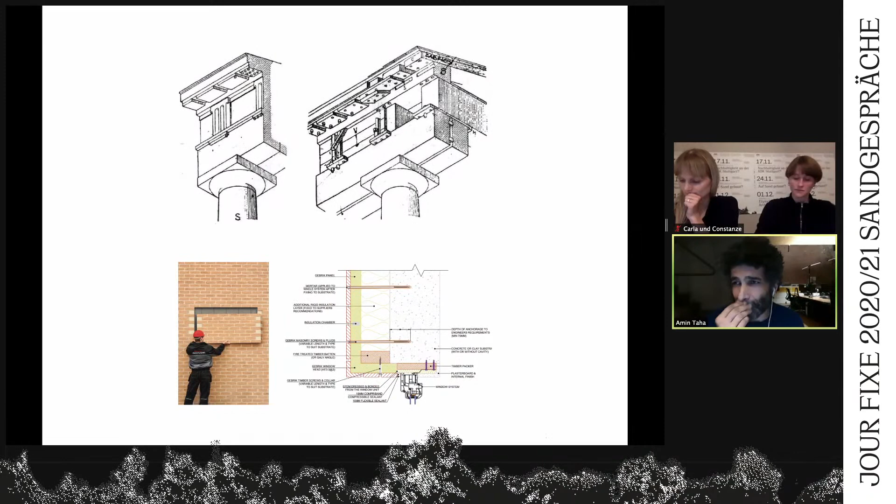why not let a contractor and a manufacturer innovate their products so you can just simply apply a brick skin, as it were, wallpaper. And the big question, which returns to your lecture series, is why not? Why not let that happen? Well, the diagram on the right tells you how typically we build today. A superstructure of concrete or steel that is thermally enclosed, waterproofed, fire rated if it's steel, and then whatever cladding, brick or stone, applied to the outside. Well, brick can hold itself up, can't it? If it's not going to hold up the building, it can certainly hold itself up as a self-supporting skin. And you can get rid of most of those other materials. So the question is more of an ethical one.

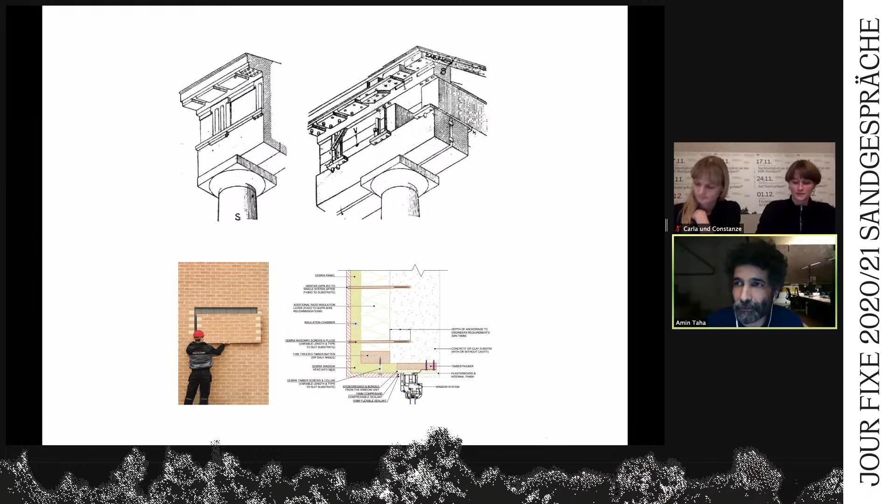So inevitably, some time after Winckelmann, people begin to question why for the last few generations as architects are we just copying, reproducing this neoclassical style? Where on earth does it come from? Why? What does it mean? And there's a number of German academics, including Semper, of course, who are asking those questions.

And then while Semper and Marx were expelled from Germany because of their sort of revolutionary ideals, they were in London, and Marx is in the British Library preparing Das Kapital, and Semper is in the British Museum looking at the new archaeological finds that have come in from Mesopotamia, what's now Iraq.

So for a throne, eventually they become ritualized in their particular knotting, and that knotting becomes abstracted in carving, perhaps into the timber instead of literal pieces of rope. And eventually that pattern becomes abstracted in terms of carving in stone or terracotta and other polychrome decoration ornamentation. But it's emblematic of a particular culture, and therefore reinforces that culture.

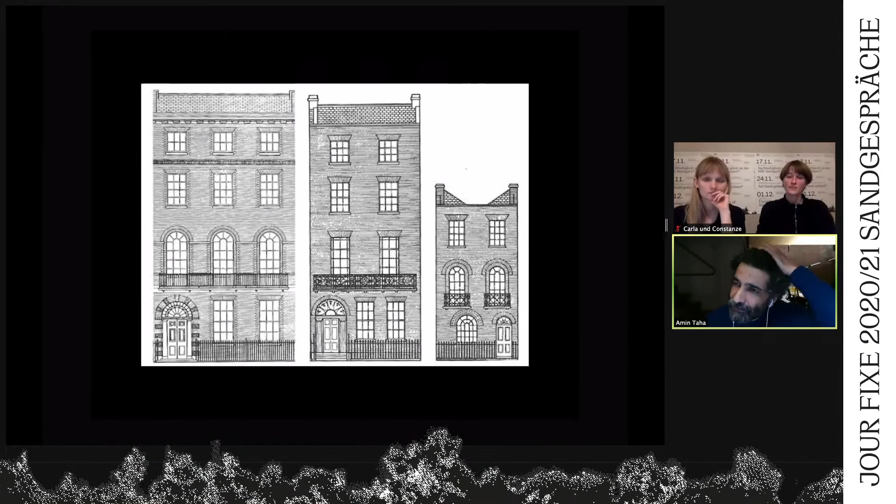So there were contractors who are also developers. They followed these pattern languages. But if you look carefully, those brick walls are actually the superstructure that holds the whole building up. They're just being composed in a way to be pleasing to the eye. So our challenge is, can we build in this inexpensive architectonic way that still has the same sort of charm, that also holds a certain sort of charm for the next few generations.

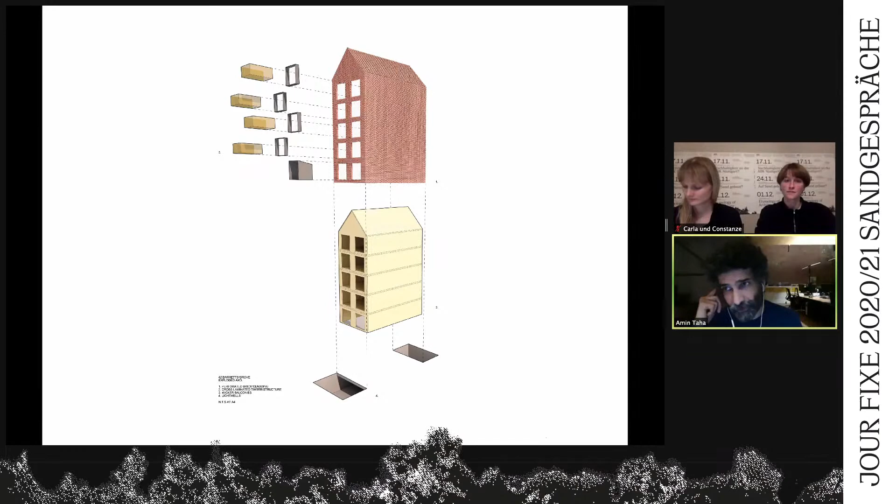Our solution is, today's requirements, thermal requirements, waterproofing requirements are obviously very different. You can't build in solid brick walls anymore for thermal and waterproofing reasons. But what you can do is the superstructure fully in cross-laminated timber and a self-supporting brick skin. So it becomes the brick that's required by our conservation area, but it's self-supporting. So the advantages of that in detail are that the cross-laminated timber is the internal finish. So there's no plasterboard, no other finishes internally.

So you've removed a great deal of material, labor, and time on site by allowing the brick to support itself, because bricks are made the same way as they have been for the last 200 years, perfectly capable of supporting themselves for 5-6 stories. All you have to do is pin them back to the superstructure to stop them wobbling and falling into the street. So you're not supporting them back to the superstructure, you're just holding them back. And the key thing about that is the superstructure does not hold the brick.

So currently, pretty much every building that's made in brick, every floor picks up the brick, which means the superstructure has to take the load and then transfer it back to the foundation. So ultimately, your superstructure is twice the size it needs to be. Completely perverse when the brick can hold itself up.

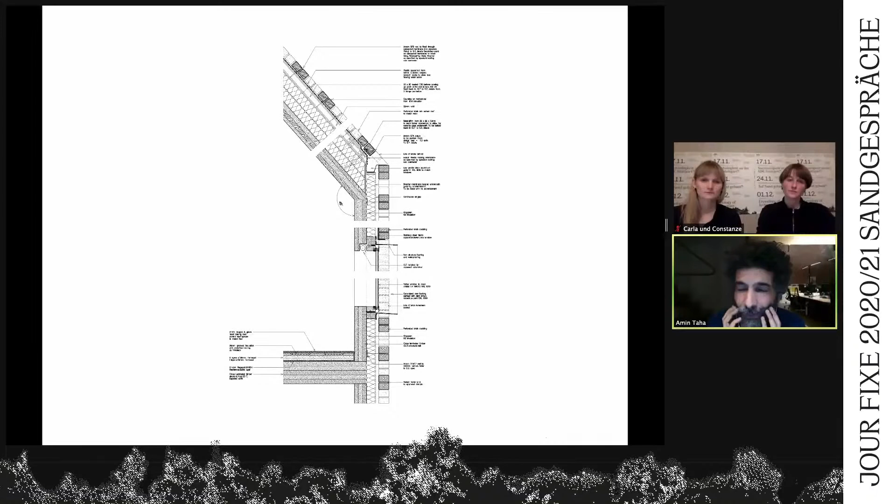So you don't do that, you lighten the superstructure, and the other advantage is the two can move separately, expand and contract separately. There's all sorts of other advantages in terms of you don't need expansion joints, you don't need weep holes, etc. It is a self-supporting skin. It does not need to be a load-bearing facade. And as a skin it's ultimately just a rain screen, a ventilated rain screen. So why bother making it absolutely solid?

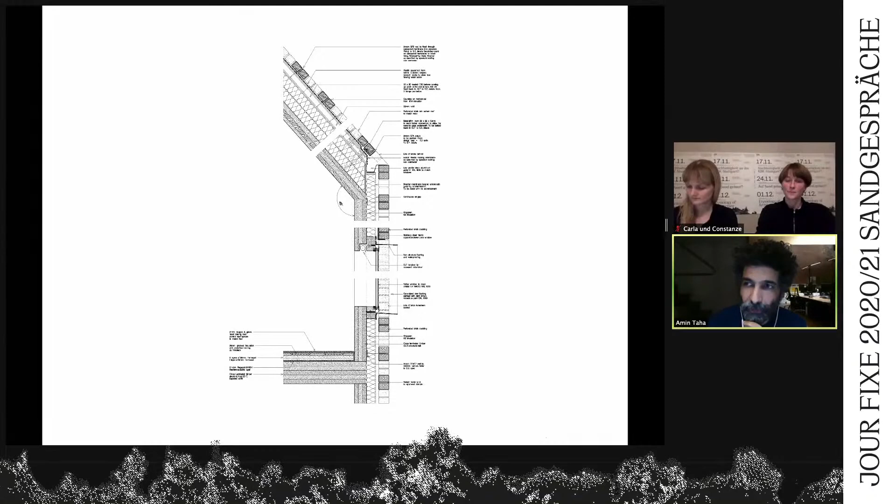You may as well just leave holes in there to ventilate. Now, this is ultimately the interior. It's all cross-laminated timber, which today you might find acceptable. But when we first proposed this in 2014 to our client, their agents said, well, no one's going to buy this stuff, but they did.

If you, as an architect, lower the construction costs, because ultimately what we did was we reduced the quantity of material on that scheme and saved the client about 25% of their construction costs. That actually meant the client ended up making 10% extra profit on their sales. Now, what that means is that really, as an architect in the private sector, all you're doing inevitably is increasing land value. You're not actually making housing cheaper because it's the private sector.

However, if it was the public sector, if you keep innovating, then obviously the borrowing by the public sector is less because you've made the building cheaper, and therefore the rents can be less. So it's highly advantageous for the public sector, no good for the private sector, apart from lowering the quantity of materials you're using, and therefore obviously being more sustainable.

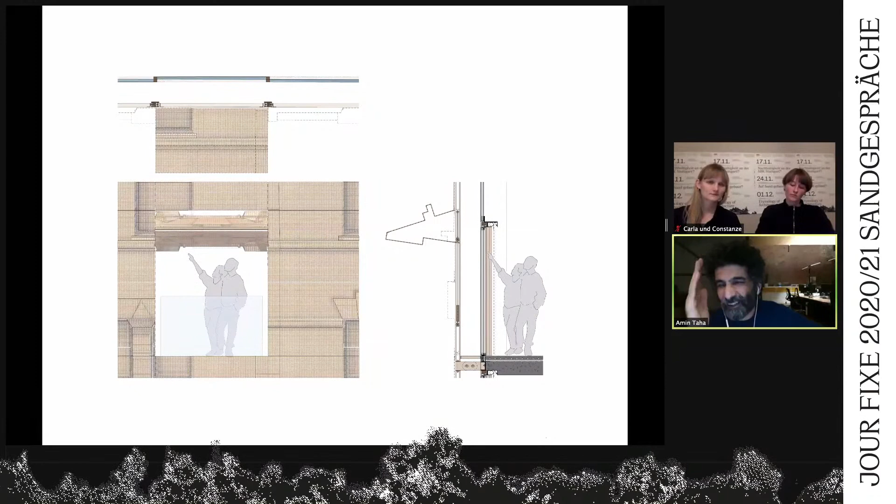And one of us, doing their thought experiment, said, well, supposing Mewès and Davis had finished the urban block, imagine if their facade was actually made out of 3 millimeters of perforated sheet that allowed us to have a very inexpensive and reduced material, real thermal facade. And then this thing in front does all the solar control where it needs to, set in front of the winter gardens, as it were, and then opens up when you want your expansive views and you've got no issues with privacy.

At the moment it's on a very busy road, with people on buses going to and from the park looking straight into your windows, and buses going past. So it had to have a number of these controls.

So the story about that last project, apart from our general background approach of how you build, what you make things out of, is leaving the decisions of those materials slightly late on in the project, because it might be, as you're doing that research, social research, historical research, that it gives you a reason to use a particular material and do away with some others.

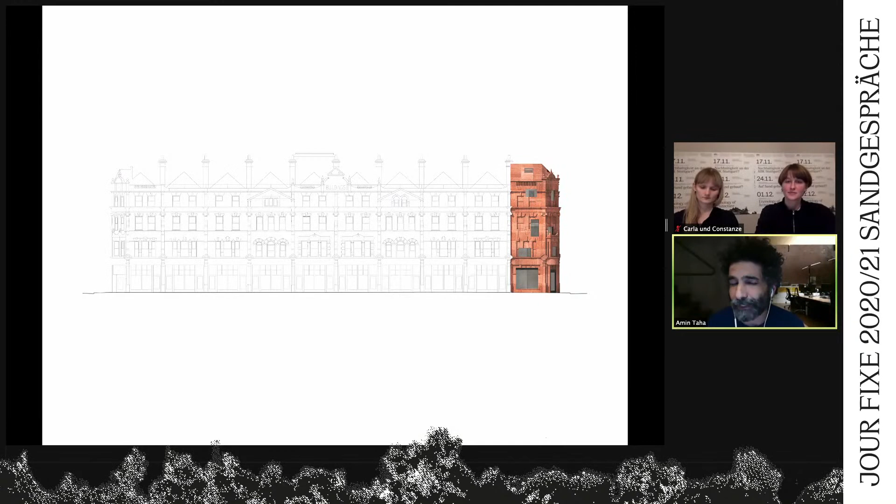And also we're directly opposite the town hall. The town hall was very keen on literally rebuilding what was there on the site, but nobody's going to do that for all sorts of reasons. And some of those I've already mentioned. You can't build in solid brick anymore. If you want to build exactly the same, the quantity of space is reduced. It's not a large site, so suddenly you end up with a compromised program internally.

And we said, well, look, we've just challenged the idea of building on the previous Bayswater site with a fake memory, an imagined memory, an imagined past. Here there was a past, and in the same way that on the previous site, when we went out to consultation and talked to councillors, they were very enthusiastic about seeing something that looked, in their opinion, old architecture. Exactly the same on this site, and no doubt we all come across this question.

And for us, the question was, why really do we like that? Why do we feel comfortable as a social group? Why do we feel comfortable with the past? Well, for all sorts of reasons, we've got used to it. But more often than not, we imagine that the past is better. It's less challenging. It's got clearer ideals, if you like, and stripped of the uncomfortable realities.

And interestingly, I think in German, the word for monument is Denkmal, isn't it? But here it's just simply monument or statue or sculpture. While Denkmal is a bit more direct, isn't it? So here we forget that monuments are really there as emblematic of an ideal, and we're all aware, especially today, that those ideals are often very flawed right from the outset. So the idea of this project was, let's choose a material which speaks of flawed ideals. Yeah, it's a monument. We're recreating the past, but clearly the whole concept of recreating the past is flawed. So let's choose a material that does that.

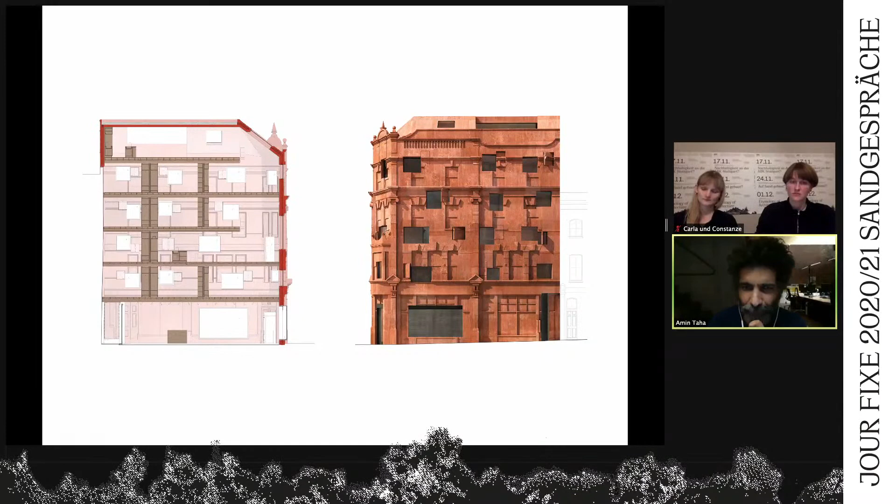So this is a terracotta mix that was in situ. And if you can see in that section, essentially it's a hollow cast. So just like casting a bronze monument, it's hollow. And then the new inhabitation in there is entirely timber. It's all CLT. So on balance, it ended up being neutral because we're spending carbon and money on the skin, but internally it's all negative, because it's all timber, apart from the fireplaces. I had to test this beforehand because no one had exactly done it like this before.

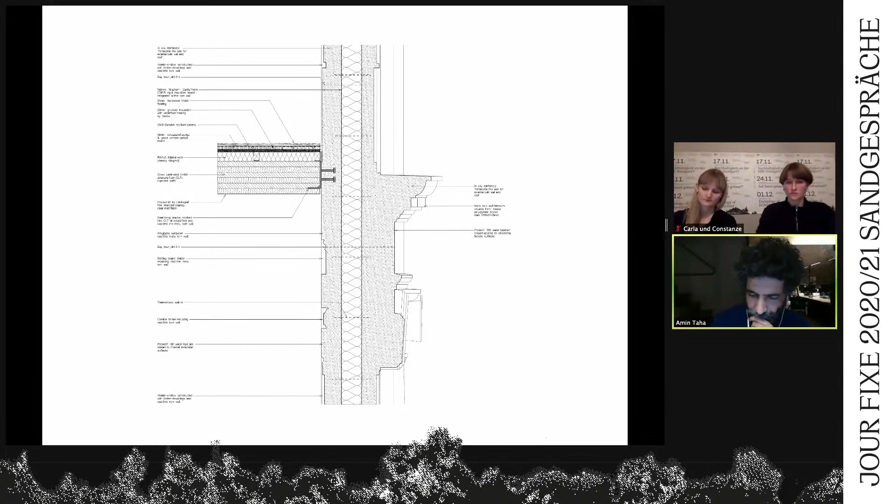So it's all in situ. It's not precast panels that are stuck on. The purpose of it being in situ is that the facade is actually holding up the building. So in that detail, you can see there, it's a twin facade with insulation in between. The two are tied together, and the CLT then is slotted into those brackets that are cast into the inside face. That's it, finished.

What we actually did was we surveyed the building at the other end of the terrace. We took that survey, flipped it, mirrored it by 180 degrees, as it were, and then translated that as a three-dimensional model to the company that did the routing out of the formwork. And we said, look, first of all, the material itself has flaws, but the process of us taking that model and sending it to the routing company inevitably will have flaws. We don't want them to correct it. And similarly with the contractor, we didn't want him to correct any flaws in the grout loss, because this sort of material doesn't want to be perfect.

And then internally, similarly, we actually put wallpaper with a release agent on it, so you get the print of the wallpaper. And as you can see there, everything else is just timber, apart from the fireplaces.

We were asked to do another competition we won, but in Sofia, in Bulgaria, which is linking a green park, landscaping, transport interchange. We all know the common languages of infrastructure, especially tube stations, metro stations, airports, and railway stations. They come with an automatic language.

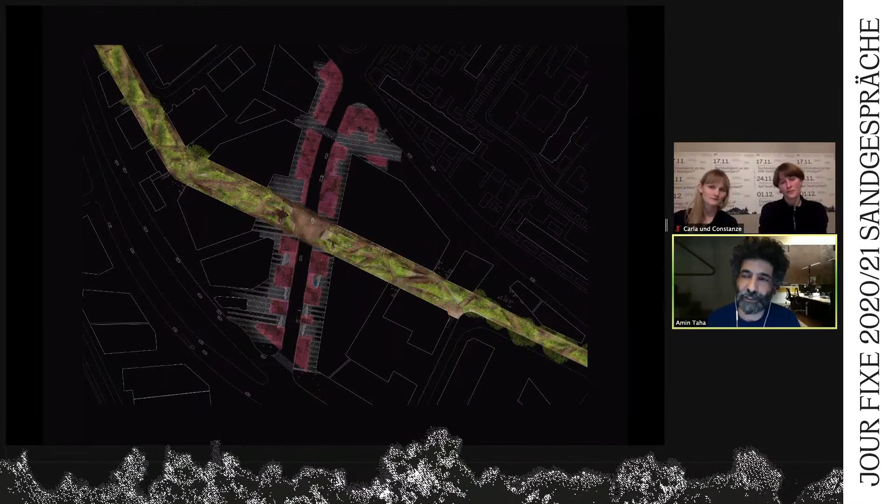And again, here, the question is, we don't want to immediately leap to any particular material decisions. Let's work with the engineers and find out how these things are normally made and see whether we can create any efficiencies. So it's that Vasari lesson, you know, understand from first principles how things are made, why they're made, and whether you can allow the fundamental materials, the irreducible materials, to perform several functions.

The standard way of building a metro is either tunneling or cut and cover. So this is a cut and cover process. Cut and cover is normally piling and then excavating. And as you're excavating, you put temporary props in position, and you keep excavating, to stop the piles and the walls collapsing in. Now, that temporary propping structure has got a lot of wastage in it, but ultimately is around about a third of the budget of building these metro stations.

It occurred to us with our engineer that supposing we don't dig out between, we just dig out a little bit to create a shallow curve. That is the dimension of any permanent bracing slab come beam between those two lines of piles, as it were. And then we leave holes in there and drop diggers and excavate the earth from underneath. And effectively, your temporary formwork is actually your permanent formwork, is your permanent structure. Once we realized that's possible, it reduces obviously the construction cost and the material quantities by a third.

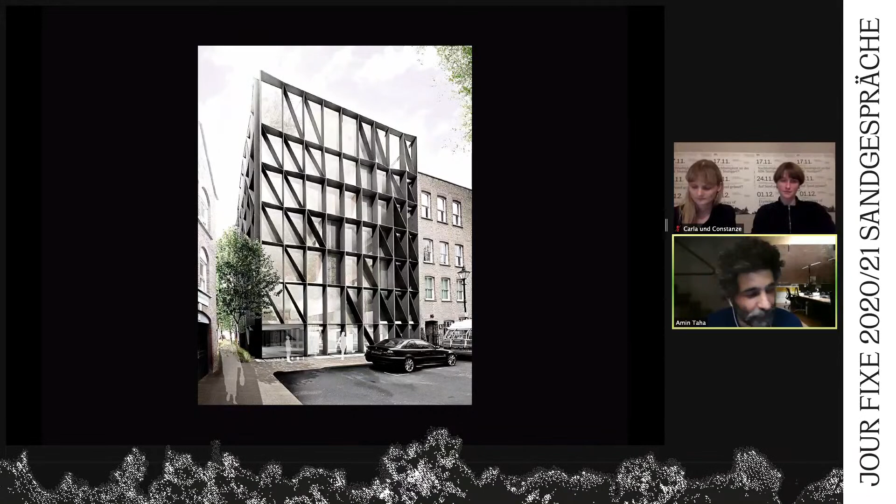So this whole area, because it was always outside the city walls, was always a bit radical, if you like. They were allowed slightly easier, more radical rules than being within the city walls, all the way until the post-war period, where somebody decided this was a conservation area, and no matter what it is, please cease your intellect and just reproduce pseudo pasts, as it were, no matter how poorly studied they are. So we gave this history to our planning officer.

We also said we've been slightly literal, and we've taken what would have been on our site, the servants' quarters, the timber servants' quarters, not the stone ones, and we've given it to a piece of software called what's effectively, if those of you are interested, parametric self-learning software, where we said, here are the rules. If it's a steel frame with a curtain wall, there's so much metal involved. Can you reduce the quantity of metal that you combine? And how do you do that?

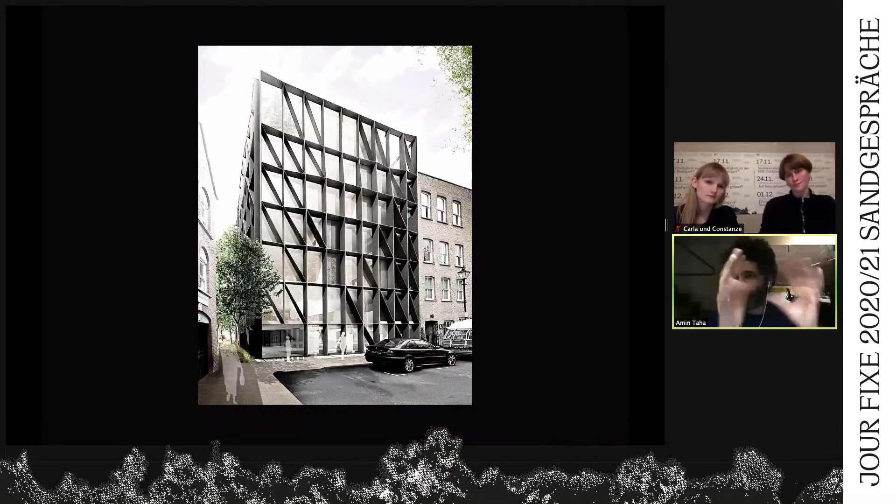And effectively what it did was create an exoskeleton and reduce the quantity of metal in doing so, but the exoskeleton was sized to a typical glazing panel. So it's a double glazed unit that then fits directly behind this exoskeleton. And if you look carefully, every time you add a diagonal to stop the building twisting, it actually reduces the amount of metal still. So there are nodal points. And you eventually strike a balance between adding more diagonals and then reducing the quantity of metal in the adjacent horizontal and verticals.

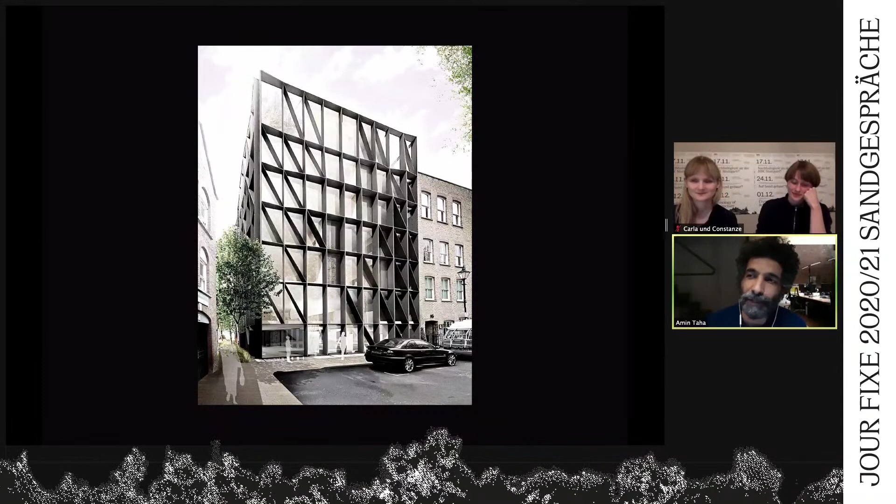All went lovely and swimmingly, apart from the new conservation officer who picked up the old conservation guidelines. And he was new to the borough. He literally said, the guidelines say it must look old or must be made of a material that used to be old. Please make it out of stone. We've got no problem with stone. So we reverted to the idea that the Normans introduced stone into this area. It turned out there were lots of quarries in this area.

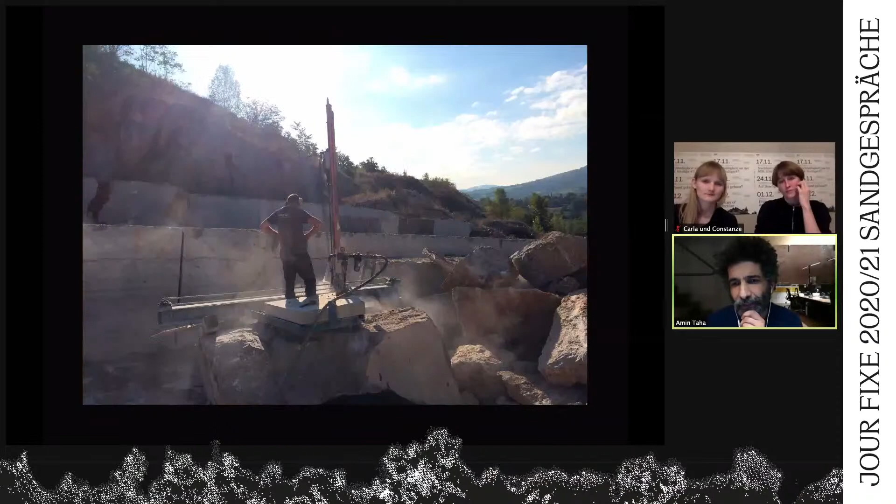So why don't we go and visit some quarries and find out how to build in stone today, not necessarily with that previous slide I showed you, which is pretty much like that first slide with the brick I showed you. What we find is a stone is cut fairly inexpensively and quickly today compared to the hand tooling of the past. There's still some hand tooling occasionally left over if the stones come out uneven. And it gives you three types of very basic finish: saw cutting, the sedimentary layer, that's the sedimentary stone, and some drill splitting with occasional fossils and crystals within it.

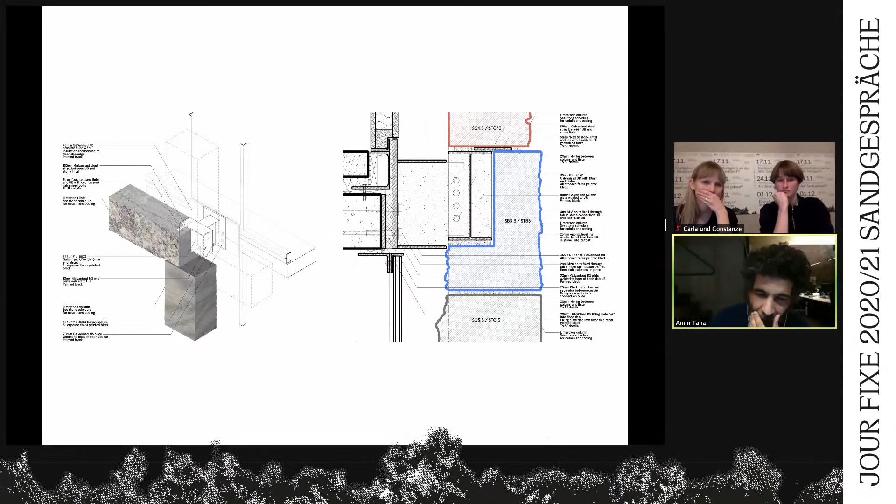And we said, okay, fine, let's see whether we can literally assemble no differently to the Normans, possibly even, dare I say, megalithic, where it's one stone on top of the other, and then bolt that back to the slab, as it were. So the thermal envelope is just a clean sealed line with a gap then to the exoskeleton. A fairly straightforward, simple detail. And then, you know, it's on temporary props, goes up fairly fast.

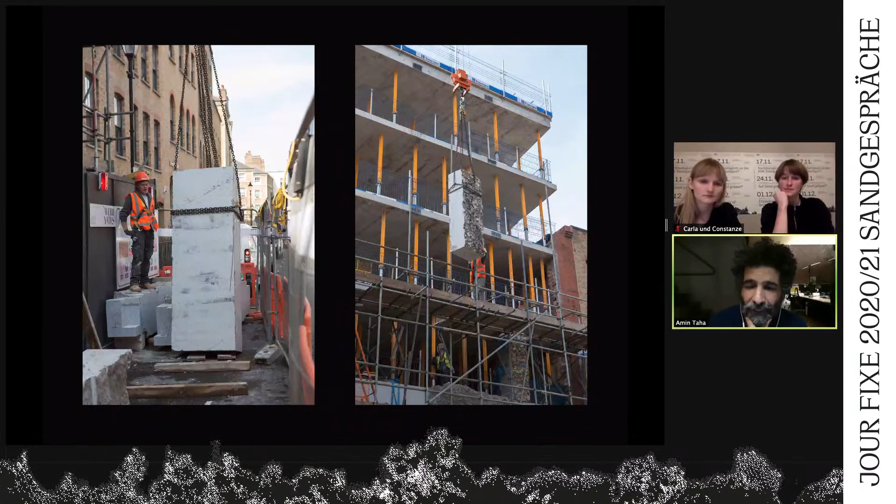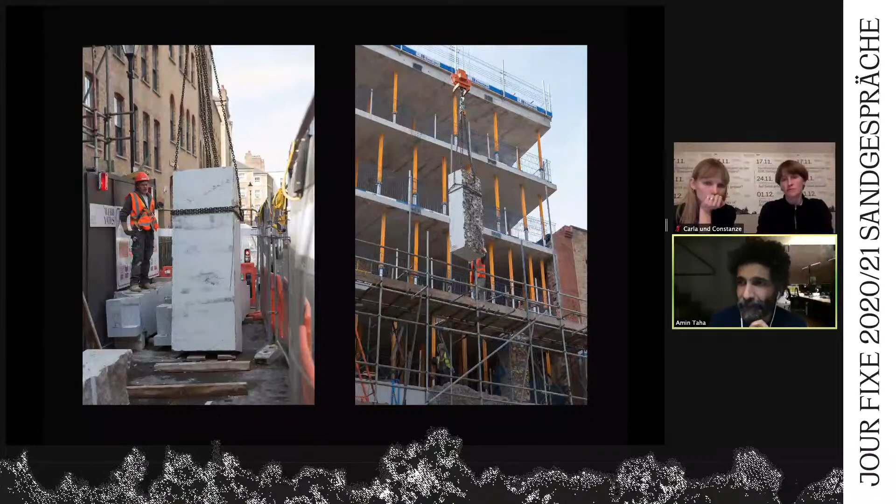Now, I think the only error we made in some respects is because we were trying to make those slabs out of timber. We originally had this design in 2012, and we were trying to make it out of timber joists, and we eventually just couldn't make it work. The whole scheme went on the shelf for a while, and then it went out to tender, was ready to go on site. In the meantime, we built the CLT structures, so it was too late for us to revert to CLT. I think we learned our lesson because the next projects then went to integrate CLT.

So there you can see the exoskeleton. Exoskeleton means it's what's called loose fit, no internal columns. Loose fit is a term that was, if you like, defined in the 1970s. And the idea is that the building is flexible. So over the next generations, if somebody decides to subdivide it, there are no internal columns or walls that are restricting your flexibility. You can remove all that furniture that's highlighted.

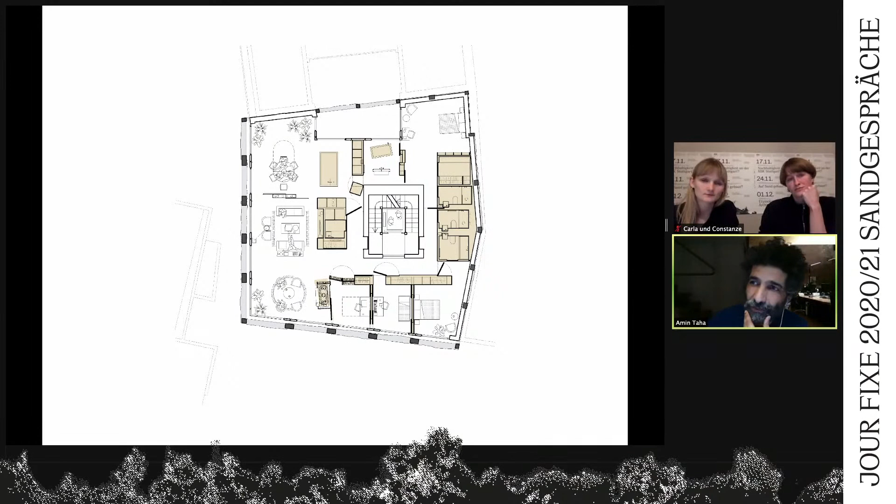So all your partitions and walls are actually just pieces of furniture with integrated doors, full height doors. Remove it all, subdivide into smaller flats, a hotel, office space, without having to demolish the whole building or considerable parts. That's it in its context with the various types of finish. These are the sort of autonomous details that Edward Ford referred to, which play on the narrative, that aren't necessarily related to architectonic elements, but they remind us of the history that's beneath our feet, as it were.

Lastly, that led to the research project which we tackled, which is the idea that, supposing you're building in five stories in stone, and we've already got another building on site now that's ten stories in stone where the floor plates are CLT, can you build in 30 stories? And the answer is yes, you can.